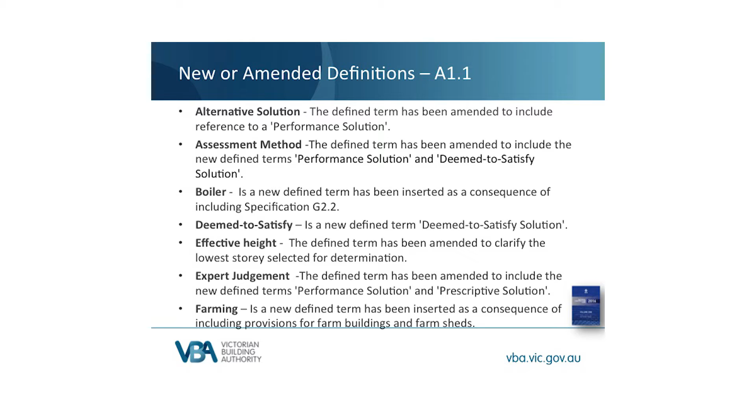Farm building is a new defined term as a consequence of including provisions for farm buildings. Farm shed is a new defined term as a consequence of also including provisions for farm sheds. Farm vehicle is a new defined term as a consequence of including provisions for farm buildings and farm sheds. Fire compartment: the terms objective and functional statement have been removed as these defined terms are no longer used in the NCC. Fire-protected is a new defined term as a consequence of new massive timber construction provisions.

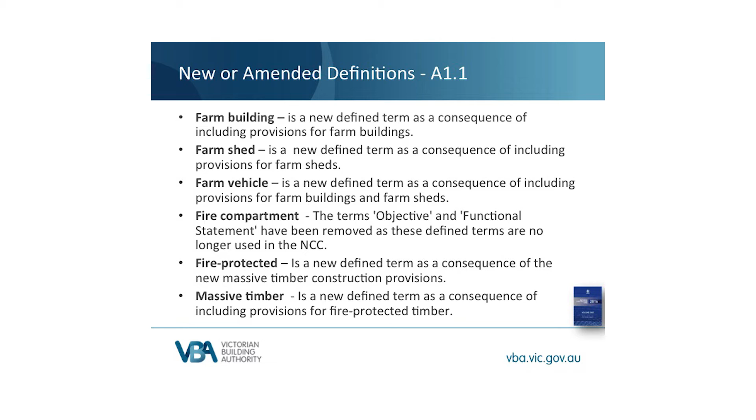Massive timber is a new defined term as a consequence of including provisions for fire-protected timber. Non-illuminated exit sign is a new defined term as a consequence of including provisions for farm buildings. Performance requirement: the defined term has been amended to include the new defined terms performance solution and deemed-to-satisfy solution. Performance solution is a new defined term and is a method of complying with the performance requirements other than by a deemed-to-satisfy solution.

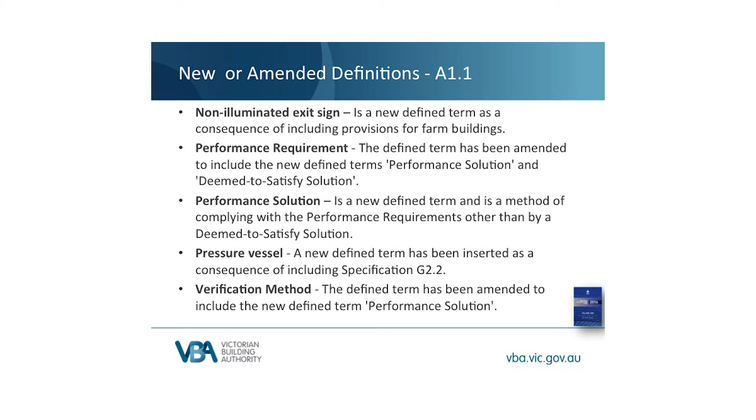Pressure vessel: a new defined term has been inserted as a consequence of including Specification G2.2. Verification method: the defined term has been amended to include the new defined term performance solution. There have been a number of definition changes in Volume 1 for this year. Most of these are related to other changes. For example, there are some new definitions for new concessions for farm buildings, and we will look at those definitions later.

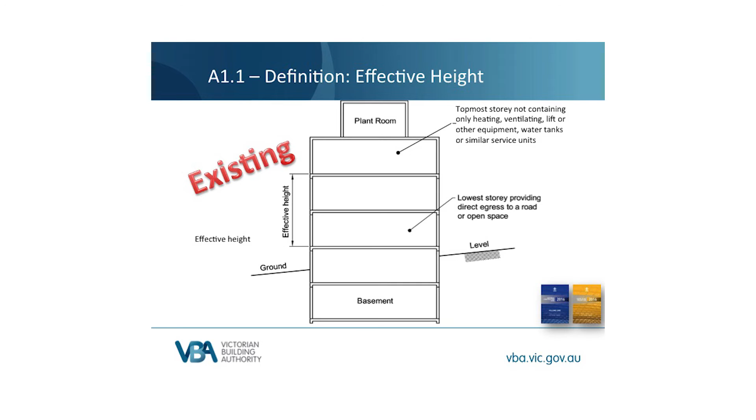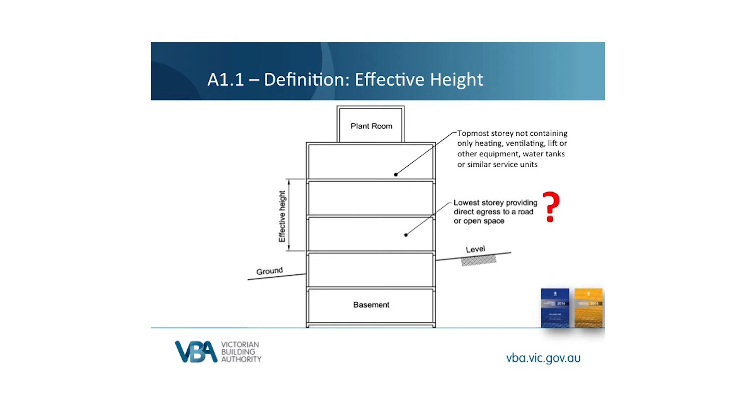Identifying the topmost storey hasn't been a problem. However, in recent years, there have been varying opinions as to which is the lowest storey that provides direct egress to a road or open space. So the provisions have been simplified. The highest storey identified in a calculation of effective height remains the topmost storey, which basically doesn't contain only a plant room. However, the lowest storey identified is now the lowest storey counted in a determination of the rise in storeys.

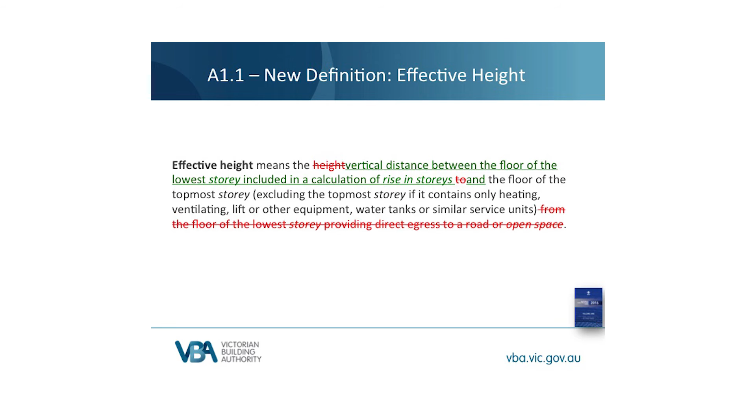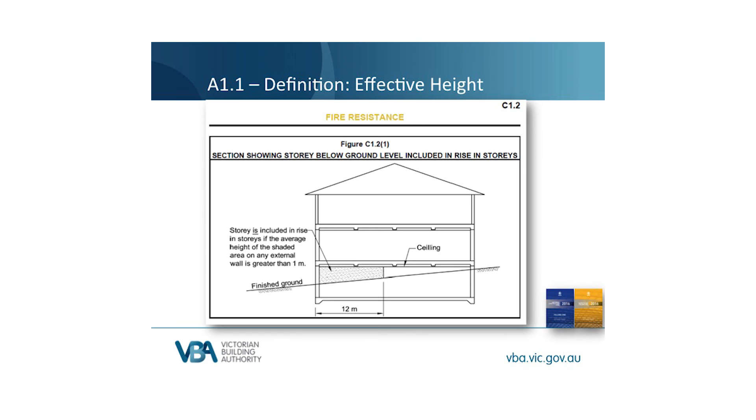The rise in storeys of a building is an existing concept which, like effective height, acts as an important trigger in the BCA. For example, rise in storeys is directly related to the type of construction and therefore a range of provisions, particularly fire resistance. BCA C1.2 contains clear instructions as to how to calculate the rise in storeys, and the guide to Volume 1 already contains commentary on how to identify the lowest storey in a rise in storeys. So in effect, we've removed any ambiguity about which levels you need to select when calculating effective height.

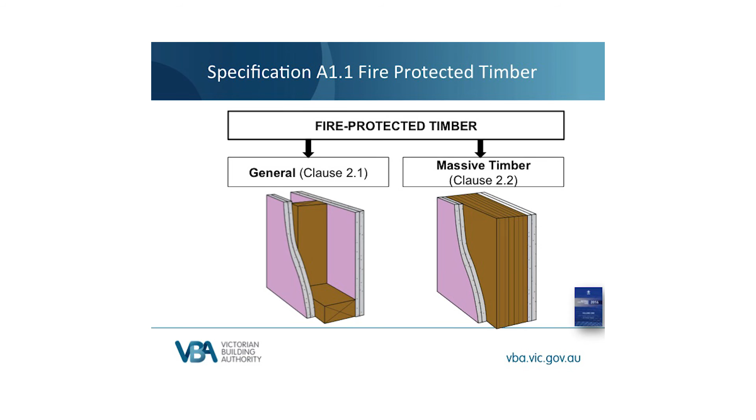The specification contains two streams. The first stream is general requirements under Clause 2.1 and can apply to any timber construction, but would generally apply to a timber-framed element, for example, top and bottom plates, studs and noggings. The next stream is massive timber under Clause 2.2, that is, cross-laminated timber, CLT, glulam and the like. Under Clause 2.1, general elements must be protected to achieve the FRL required of the element. It must also have a covering which resists incipient spread of fire for not less than 45 minutes. In the absence of a spread of fire test, 2 layers of 13mm fire-grade plasterboard can be used instead.

Under Clause 2.2, massive timber must achieve the FRL required of the element. Instead of a spread of fire test, it must pass the test which measures the temperature at the interface between the fire protection and the timber. Table 1 gives the minimum time in minutes until the interface reaches 300 degrees Celsius. In the absence of the test, there is a minimum thickness of fire-grade plasterboard given in Table 1. Because massive timber has an inherent resistance, you generally end up with slightly less fire-grade plasterboard for massive timber than for general timber construction. Both requirements can be met by the same system.

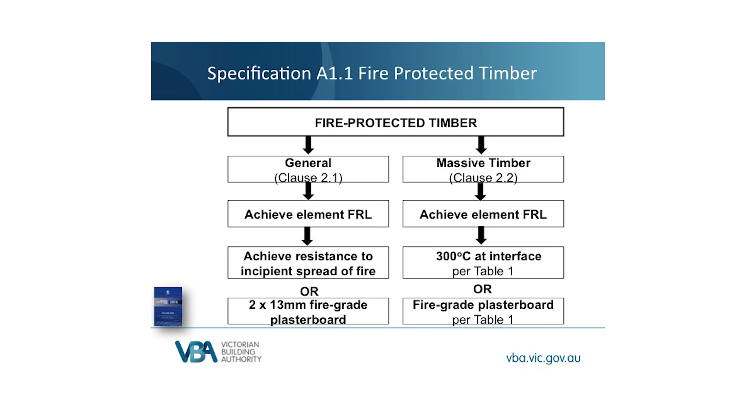As you can see, we're coating the elements with fire-grade plasterboard for different requirements. Firstly, to achieve the FRL, and secondly, to resist incipient spread of fire or to keep the temperature below 300 degrees Celsius. I need to clarify that the fire-grade plasterboard we use for one of the requirements can also be used to meet the other requirements. You don't need to put on 2 layers of 13mm to get 90 minutes and then put on another 2 layers to meet your resistance to the incipient spread of fire requirements. You only need to put on 2 layers to achieve both requirements. That's what fire-protected timber is: timber elements protected with fire-grade plasterboard to achieve the requirements of Specification A1.1.